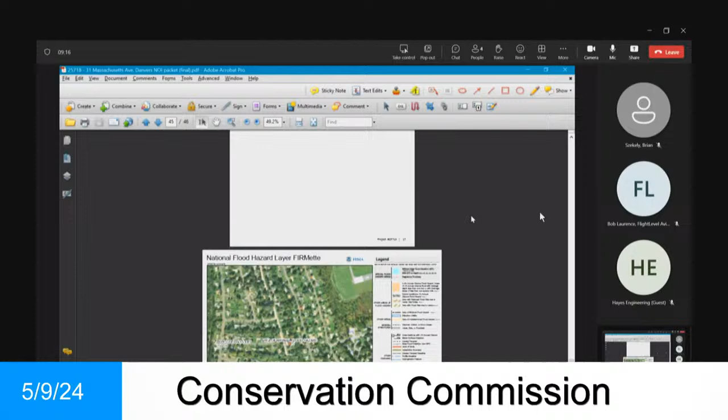Could you bring up the plan? So behind 31 Mass Ave is the perennial stream Frostfish Brook. Associated with that is a 100-foot inner riparian zone, as well as a 200-foot riverfront area. This is the Woodville area.

Yes, I believe so, I'm not from Danvers, sorry. We're all familiar with the Frostfish Brook, you guys just repaired the bank recently, right? But yeah, so his entire lot is within the 200-foot riverfront area. So what he wants to do is add a garage.

Okay, go up and point out what you have now and what you want to do. So this is his existing single-family home, this is where his driveway is. He wants to add a garage addition on this side of the house and then relocate the driveway. With regards to, do you need any other relief, like side lot line relief or anything for zoning?

So, Jay Plakowitz with Hancock Associates. The project's already gone to ZBA. Some of the roof overhang was in the side setback, and it was approved by the zoning board. The way the side setbacks work on this site, this is the only location they could put an addition, so that's why the garage and driveway are flipping from one side to the other. Okay, and so you got that relief already? Yes. All right, do you want to continue?

So I can talk a little bit about the drainage design that we've done here. So you can't see it now, can we pull something up? It's not at the end of that packet, it's in a different place.

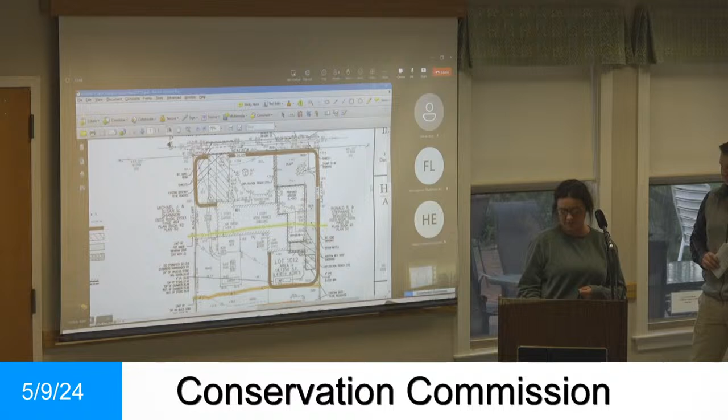We are increasing to 1,677, which is below the threshold, below the 10% for the computation for the whole lot. The lot is 18,125 square feet, a 9.25% increase, which is below the 10% threshold.

What's behind the back of your lot? We've had people come in and do something in the back to compensate. Are you familiar with that? So it was vegetated when you altered the bank, there were plantings already in place there. Did you place those? No, the town did. And they're there now? Yes.

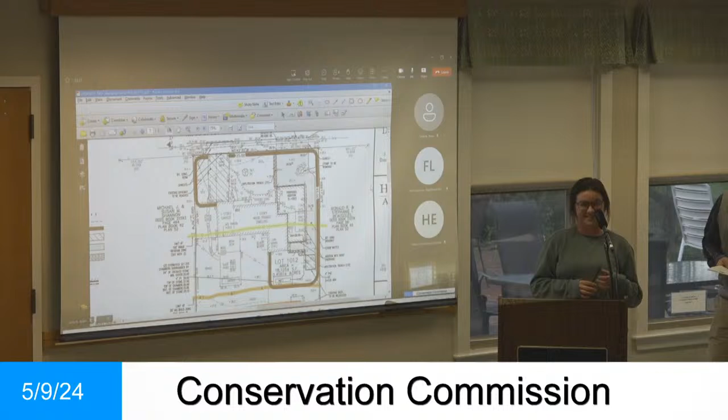Is there any way to see, can you zoom in so you can see where the water is, around the brook? Okay, thank you.

And the 200 encompasses the whole lot, doesn't it? Yeah, which is not unusual for Woodville. Any other questions, Mary Ann? The green border is the bushes. This is the mean annual high water associated with the brook.

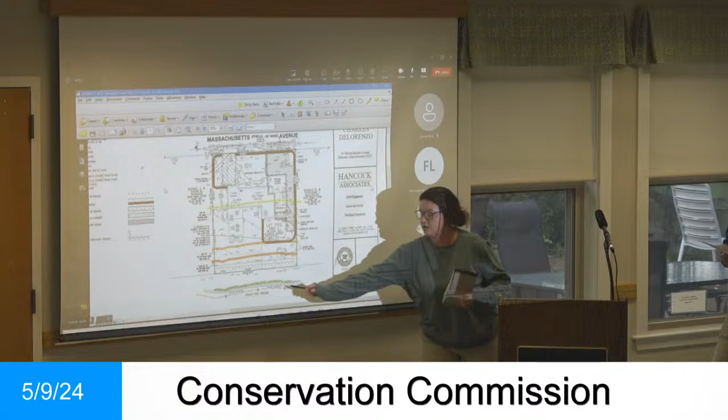Could you tell us a little more about what you're doing with the drainage? The proposed driveway is pitching at a 2% slope to the south, which is on the left. That water from the driveway will be picked up by the infiltration trenches, about 3 feet deep, 2 feet wide. It's a dug trench filled with crushed stone, so the voids in the crushed stone provide some storage volume for the storms. At the rear of the house, there's a trench that'll pick up the driveway, so instead of the driveway being super elevated to one side, it's a consistent slope down to that infiltration trench.

And then the roof area from the proposed addition will go into the subsurface chambers here. So we're mimicking existing drainage patterns. There's a high point in the middle of the site that splits the site, going towards the street and towards the brook, toward both discharge points. We're cutting down on peak rates. That's just what is existing, we're just maintaining what's out there.

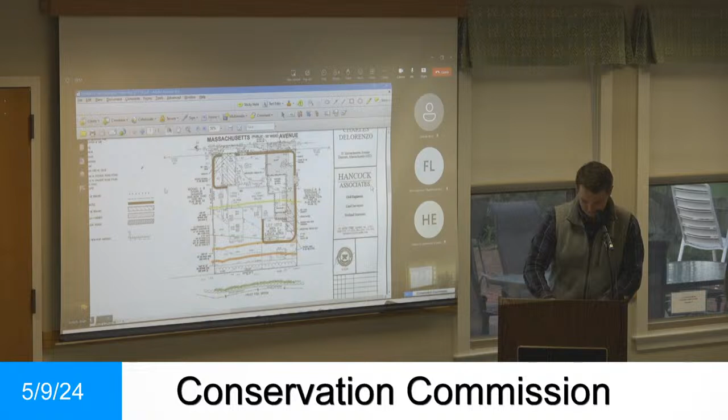Are you removing any impervious? We're removing the old driveway. How many square feet is that? Do you have the square footage of the driveway itself? Approximate's good, I'd have to take a guess. We just have the net areas here, so the existing area is about 1,300 square feet. So you're removing 1,300, and how much driveway are you adding?

Again, these are net, this would include the area of the addition. Well, not the addition, I'm just curious. Yeah, it's probably just a little bit more than 1,300 square feet, the new driveway's a little bit bigger than the existing driveway.

And what are you doing with the part of the driveway that you're removing? It'll become landscaped, so essentially the site's just becoming a mirror image of itself. Landscaped how? I'm assuming grass. It's a front lawn existing, yeah, so the whole site is lawn. There's a fence at the rear property line, and from the rear property line towards the Frostfish Brook it's vegetated. From the fence towards the road, it's lawn and general house landscaping.

And last question, what's the flow of water like, the runoff? My exact numbers are in my stormwater report, but we're reducing the runoff rates from existing to proposed with our drainage BMPs, so there'll be less runoff in the proposed condition than existing.

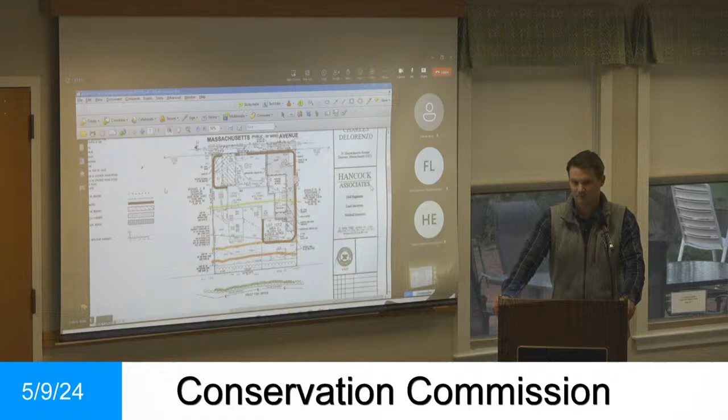Any further questions from the board? Does anybody feel a need to go out there? No, I don't think so. I'm good with that. Does someone want to make a motion to issue an order of conditions?

I'll make a motion for an order of conditions for 31 Massachusetts Ave, DEP file number 14-1416. Any special conditions? No, none. The motion's been made.

Second? Do we have a second? Yes. All in favor? Aye. Okay.

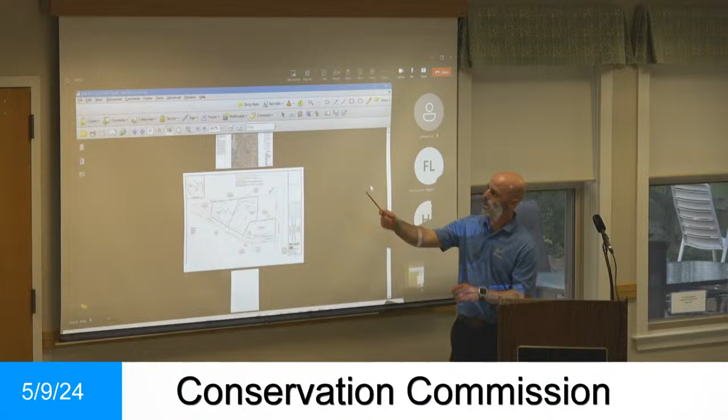Could you give me an idea where that is on Route 114? We have a locus on the sheet if you want to pan, if that might be helpful. Is it by LaBelle's Grove? Yeah. Okay, all right, there we go, perfect, there it is.

So toward the rear of the property and a little bit in the middle, there's a BVW that bumps out. We had it flagged by Norse Environmental Services, and we're hoping to get the delineation confirmed across these 3 lots. We haven't been out there, right? Not that I'm aware of. So I don't think we would confirm it without at least going out, or having somebody else look at it to see if they agree.

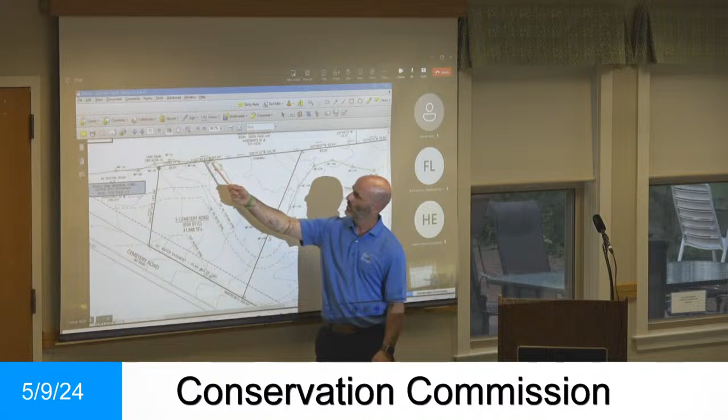Has this ever been staked before? Not that I'm aware of historically. So there was no previous applications where there would have been a delineation? Correct, none that I'm aware of. And where are the wetlands? It's this green line, goes right through here, off that way. And it's staked now? It's flagged, yes, we located the flags to put them on the plan.

Well, I think at the least, I would want to go out on a site visit to see where the flags are and then decide whether we need to have anybody confirm that or say that looks all right. Right, absolutely. If we want to take a look, well Peter's not here now, but I can help you organize a site visit, something post-meeting. Yeah sure, we have more daylight hours now fortunately.

What would be good with you guys, at the end of the day, or? We'll make ourselves available anytime. Whatever works for you guys. All right, I'm going to leave it, so you're okay to continue this then. Sure, yeah, typically commissions want to walk these, so I expected such. We always want to go out, not just confirm it without at least going out there.

Right, absolutely, staff will arrange for a site visit, correct? Yeah, I'll work with Craig, first get a couple of dates from the commission, and we'll work with Marchand and Associates to get guys out there. Great, we appreciate it. Is there anything else you wanted to add at this time? No, the ANRADs are straightforward on my end, so I don't have much to add. We don't know what projects are proposed at this point. No, you just want to do the delineation and have us put a stamp on it. Exactly.

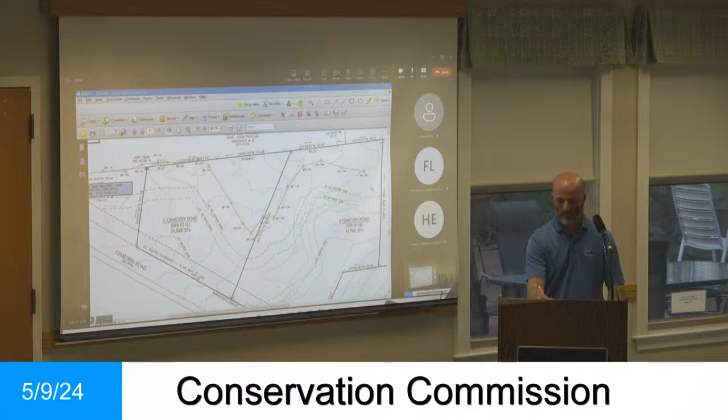All right, when's our next meeting, Brian? June 13th was canceled, correct? Correct, hold on a second. I believe that June 13th was canceled, but we can just say the next available Conservation Commission meeting. Well, what is that, 2 weeks after that? That would be June 27th.

Correct, so June 27th, did someone want to make a motion to continue? I'll make a motion to continue 348 Andover Street, 3 Cemetery Road, 5 Cemetery Road, DEP file number 14-1417. I'll just say, folks, we don't know what the project will be, but the applicant is saying there's wetlands there. We want to mark off where we think the wetlands are, and if anyone came here because they were interested in this, the matter is being continued till June 27th.

All right, okay, so a motion has been made, do we have a second? I second. All right, all in favor? Aye. All right, we'll see you on June 27th. Thank you very much, and look forward to going out there and meeting you out there. Great, thank you, we appreciate it.

Well, it's up to the applicant, the owner of the land. You have to require owner's consent. I'll speak to my client and see if that's agreeable. You can check through, if you want to give your name and information to Brian, then you can go through him. Is that something you're interested in doing? Absolutely, yes. Good, make sure you give him your information then.

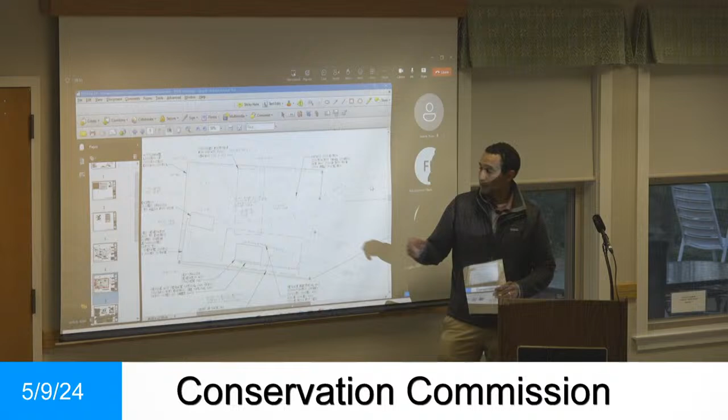I was just curious, because I remember we were walking around and I was asking where the conduit was going to run. Yeah, so the existing utility pole is just outside the fence line. We're gonna pick up through there, connect to the electrical cabinet, and then run a new conduit from the new cabinet to the new concrete pad, which will then penetrate through to the generator. So it's only the small area of electrical work within the station. And then it's a natural gas power driven generator, so we're also running a new natural gas line into the station, into the generator as well. Again, just that short distance? Yep, correct.

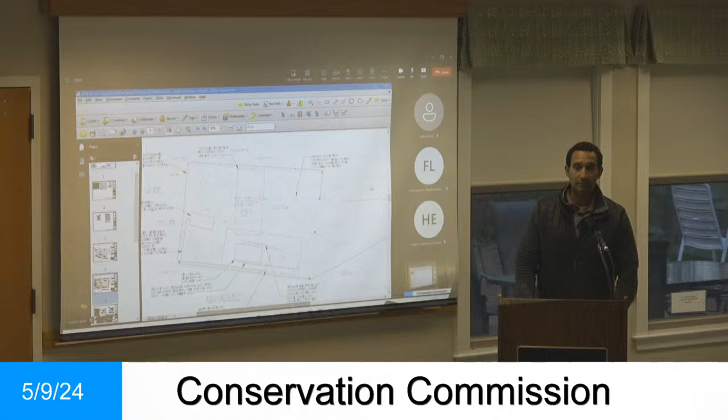Any questions? No? Any questions from the audience? Any concerns? Would you like to say something? Come up and identify yourself, sir, and tell us where you live.

I'm an abutter on the North Street side of the station, and I just heard about it, so I don't really know too much about it. Is it all going to be contained within the existing station?

I think those questions can be answered by Mr. King. Did you get the question, Steve? Yes, through you, Mr. Chair. Everything will stay within the existing fenced-in site. Nothing's going to be expanded. The footprint stays the same, correct.

Okay, I've been there before the station was put in. They put the street down off of Summer, and it was like wetlands, with water coming through from North Street and down the hill from Summer Street. When they put the road in, they...

Excuse me, could you repeat his comment? I didn't hear any of it. Did you want to speak up? Sure, I'm sorry. I've been there before the station was put in, and...

It was a wet area coming in from North Street and Summer Street down the hill on the road, and they put that new road in. When they did, they put piping underneath for the drainage to go through to the wetlands out back.

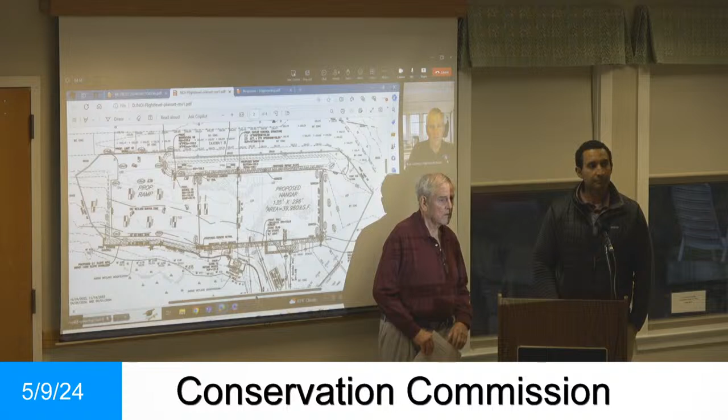Chair, if I may, real quick - very quickly, there were 3 points in the last response memo that were not addressed. Mr. Ogren talked about one of them, which was Standard 10. This is in my memo. So Standard 10 was that Tighe and Bond recommended the Conservation Commission condition the approval based on a signed illicit discharge statement being provided prior to issuance of a building permit. That would be a special condition. They've already agreed to that.

The other 2 points that are still unresolved: the applicant shall provide a detail or notes on the proper installation of the slope stabilizer. And the third and final is to provide a pipe crushing analysis that supports the claim that there are no concerns with the structural integrity of the iron pipe. Alternatively, they recommended that the applicant can choose an alternative pipe material.

So those could be conditions upon this, yeah, where they could not get the stormwater permit unless the engineering team is satisfied. So you're saying the project couldn't go forward, can't get a building permit, until he gets signed off with the stormwater permit?

So what exactly is a signed illicit discharge statement? They need to have a third-party engineer saying that, the way the project is designed, it's not going to be doing any type of illicit discharge. And what would be an illicit discharge? One example would be discharging into a wetland before it went through one of these barracuda devices, as an example.

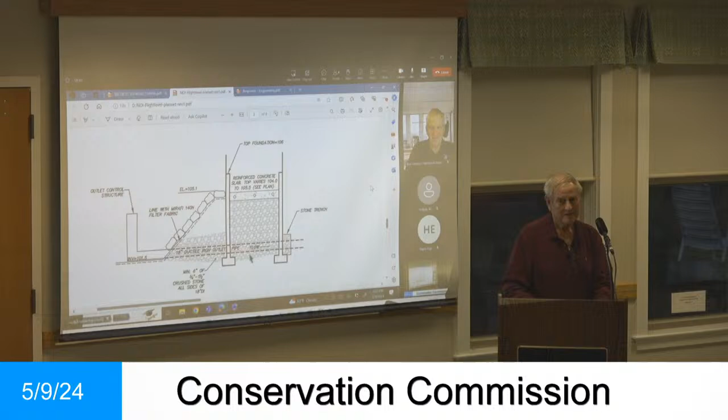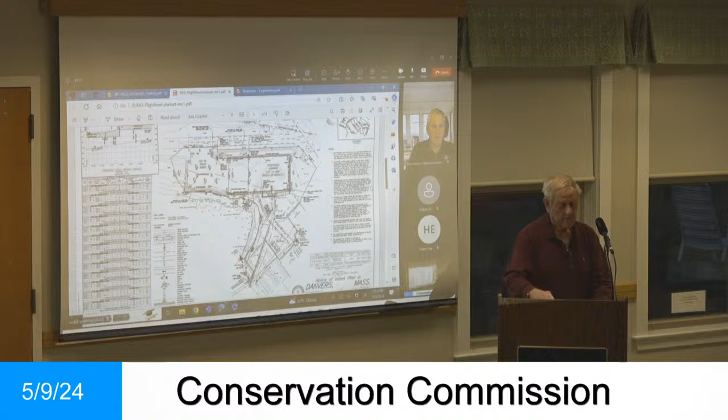Is there anything else you want to say at this point, Peter? No. And the gentleman in the back, no? All right, anybody? In the back, Mr. Zuber. Oh wait, let this gentleman go first. Mark, you want him to go?

Mark Lentini, 200 Old Burley Street. Let me first say that I'm not opposed to a hangar going into the airport - that's what they do. What I am opposed to is discharge into the wetlands, and I believe I sent videos of the runoff from said wetlands onto Old Burley Street. And the poor girl that lives at 204 Old Burley Street just bought the house - every time we get significant rain, her yard turns into a pond.

201, and 204 - from 202 to 204 turns into a lake. You can't drive down Old Burley Street without it being covered over with water. I did get down there when it was wet.

My comment is, if they make this project and it doesn't impact what's going on, all things stay the same, you're still going to get the same flooding, which our town engineer has said there's a blocked drainage.

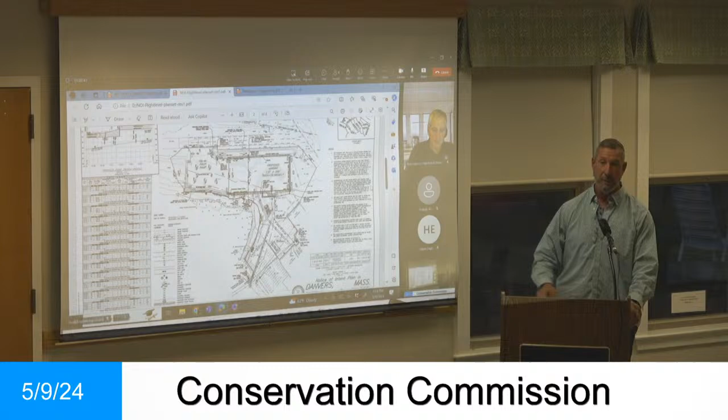That's at 91 Burley Street. I'm at 200 Old Burley Street. Taxiway, wetlands, Old Burley - how far are you from the hangar? Right there, we can walk through the woods and be there in 5 minutes, not even. So any more water that's going into the wetlands is going to impact not only Old Burley Street, but Burley Street, 2-Lane Road, and Bradford.

That's where it all goes, because there's not sufficient stormwater drainage that the town has put in. There's one at the corner of the airport entrance, and there's 3 more before you get to Wenham. Not enough for the volume of water, and now we're going to be putting more water from a detention pond into the wetlands. I'd like Peter to address that, because he's saying you're going to increase the volume of water into an area that's already flooding.

This is the first I've heard about this new area. I have videos, I'd be more than happy to share them. I shared them with the commission, I sent them to Aaron Henry. It didn't come up last meeting.

Peter, could you just go to the mic? So the question is, does this increase the volume of water going into the wetland? It does not increase the rate of water going to the wetland. It's attenuated, and this infiltration meets the standards of the stormwater requirements of the Wetlands Protection Act.

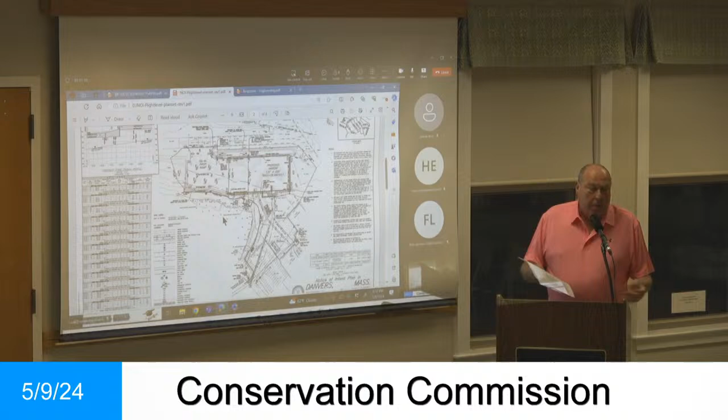I mean, there's a bond on it, right? If I'm not mistaken, those are the items you haven't reviewed, right, Steve? We responded to all those items and submitted it over a week ago, and they're not relative to the notice of intent, they were relevant to the stormwater permit. Also, Tighe & Bond was content with all of our modifications except for 3.

Right, so just to be clear, our peer reviewer- Mr. Betancourt's 100% right, the peer reviewer gave him up 32 points. The applicant has responded, and T&B, Tighe & Bond, has responded to that response, saying that they are satisfied, other than the 3 points that I made earlier.

Yeah, I just don't know if I'm convinced yet that they're not going to add to the existing problem. I mean, so I understand they've got a problem now. They are not allowed to add to the rate, period.

We're missing a big problem, though. The big problem is the place over there is contaminated. It's PFAS over there like crazy, okay? How do we know that water is not contaminated? Have we had samples of that water? They have consultants right now on the property checking for PFAS.

And if you folks know how it works, when you have PFAS, you dig up in a different area to dilute the sample so it passes, basically, okay? I know for a fact they have consultants on the property. That place is contaminated with PFAS, okay? And how do we know that water is not running into the brooks already? It's contaminated with what? The property over there is contaminated with PFAS. What is it? PFAS.